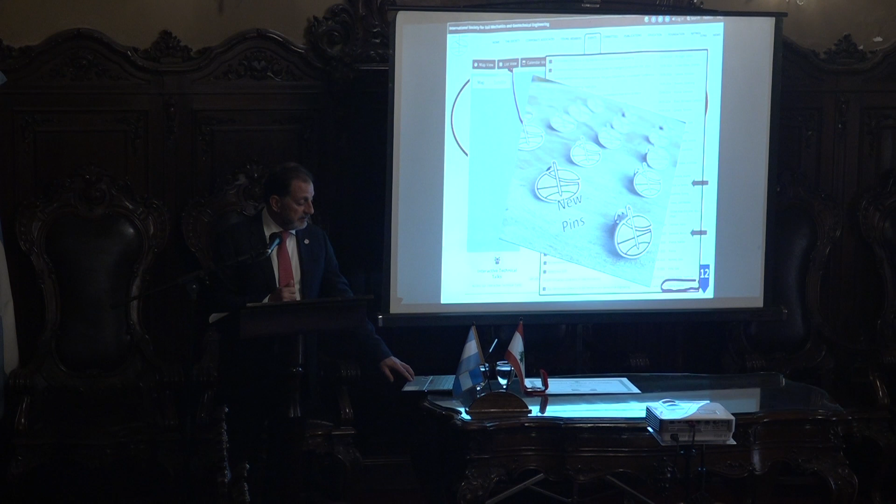And of course, we have other conferences coming up, in La Serena next week for the Pan American Conference. We have one coming in Lebanon. And you can recognize we introduced the new pins for the board. This is something you will like. I started this idea, a dream, and it became reality.

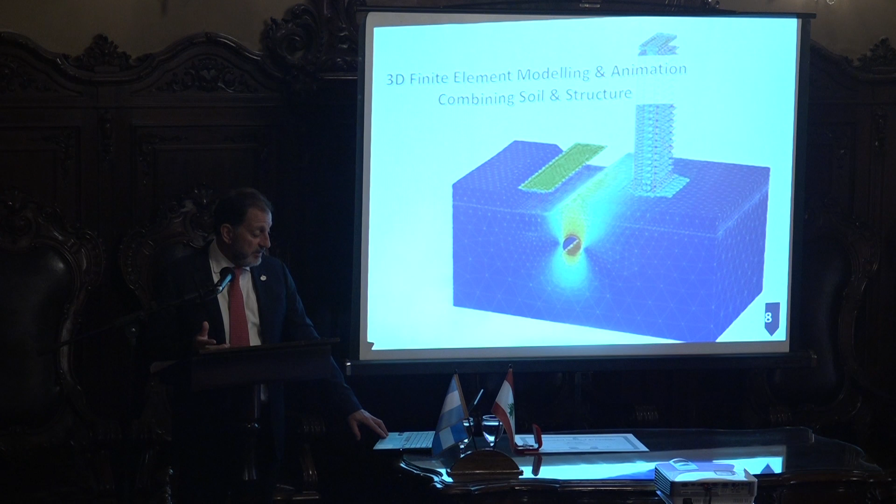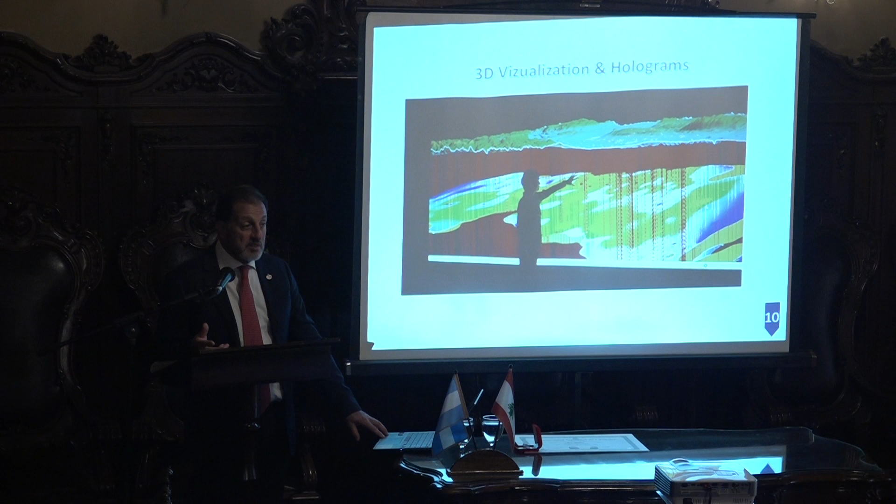So what I'm saying is always run sophisticated thinking prior to sophisticated software and analysis. Use as many methods as possible, even the latest technology like 3D modeling, AI, BIM, digital twins, 3D visualization, holograms - like geologists, they use it a lot. AI, remote sensing, drone mapping, all of this for sure. But we go back to the history, like this building, and this is what makes you feel strong.

If you see here, engineering life - what that means, I keep telling everyone - there is engineering in every move of your life. You can check the centrifugal force, you can check, let's see if it works.

This one, we need Ave Maria. No? Atmospheric pressure.

What do you think, will it work? Not all the time. If there is atmospheric pressure, the glass can be 10 meters high, right? But no, it's only a few centimeters, so it should be easy to remove your hand.

So there is engineering in every move in your life. The more you observe it, the better engineer you are. They tell us static friction is stronger than dynamic, but it's not always the case. Sometimes dynamic, applied with deformation and structural mechanics, becomes a better solution. I can stay doing magic all the time. It's not magic.

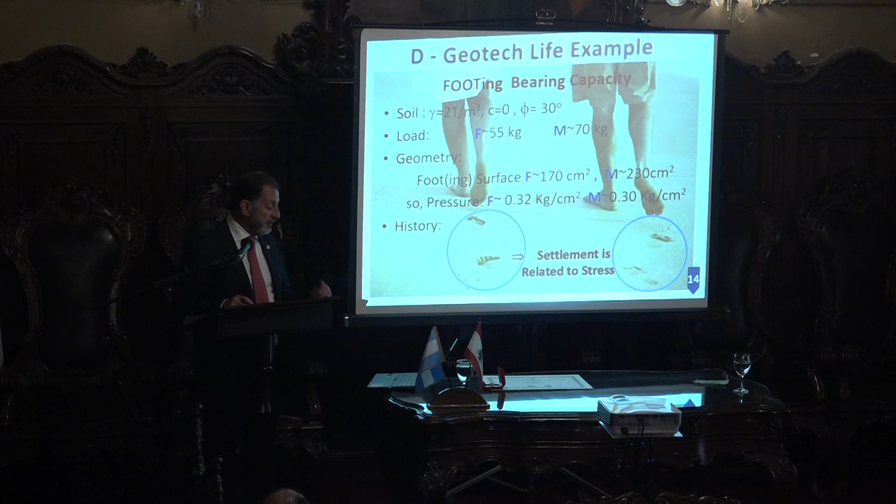Footing surface, footing. So the foot for ladies is smaller, but the pressure is almost the same. The female may have slightly higher pressure on the footing, especially with high heels. But even here, if you look at the history they leave behind them, you can detect that settlement, for example, is related to stress, not to force. And if you apply the most common equation, Terzaghi's equation for bearing capacity, you'll see the bearing capacity is 0.1 kilogram per centimeter square, but the pressure on the footing is 0.3 on the foot.

So is this failure? In theory, it is failure. Why? Because failure is defined by us, the criterion. If the criterion is I don't want to see any deformation on the sand, we fail. But if the criteria is different, practical, like geotechnical engineers, you know they sink a little bit, so what? And then it stopped. Is damage acceptable? Yes, so it's not failure. This is the difference between theory and practice.

In clay, this may not be the case. I just mentioned this for geotech. So if we keep going, now we look at more details.

The suction, if you notice, they're not walking on dry sand. They're walking on wet sand, not fully saturated sand. So if you add the suction component and play with the possibilities, you'll see that if they sink a little bit, 1 centimeter, and you have suction, they're safe because the ultimate bearing capacity is much higher than the actual pressure.

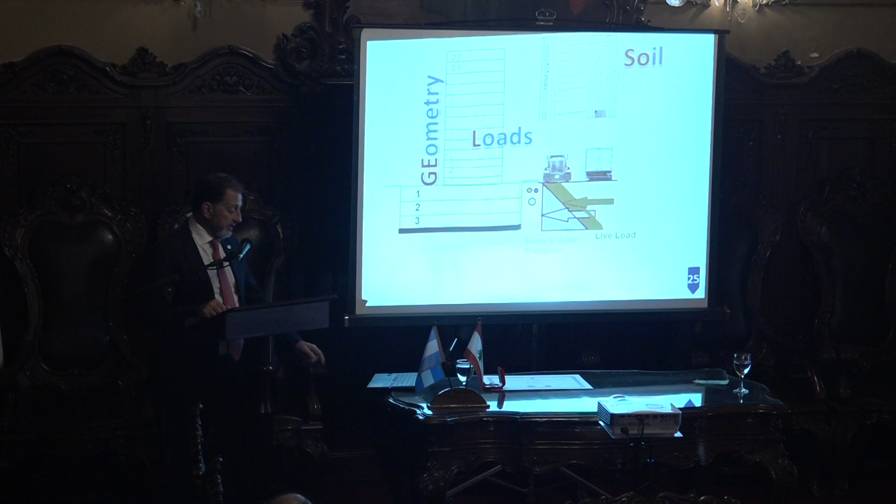Everybody was running, including myself, to see what happened. And I will go back to soil-geometry. We collected the soil data, the geometry, the loads, lateral loads, of course, where we put the anchors. But the most worrying load for me was how to detect the impact of 20 stories on the existing mat — how is it going to turn and hit me on the sides? There is nothing in the code, nothing in the book, about how to determine the force that's going to hit me laterally.

I had to crunch my brain and go back to the original Fourier series equation I showed you, and use historical data from a similar demolition in a nearby but smaller building. I had to exaggerate a little bit and go using the Fourier series from the time domain to the frequency domain. When you do that, you can detect the peak acceleration and use those peak accelerations to determine the expected pseudodynamic forces. Keep in mind those deformations — I'm going a bit faster due to lack of time.

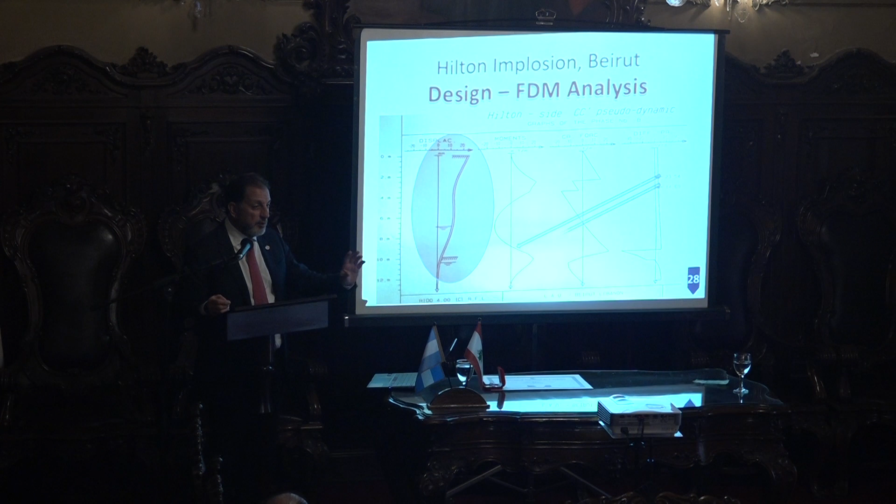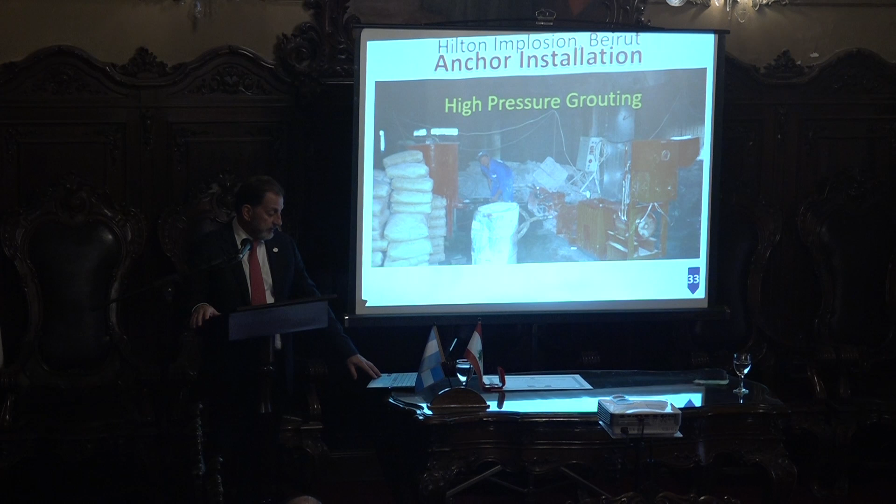This was a big question mark until they cleared everything, and I was very happy to see that all the walls were still stable, with all the ground anchors sustaining the dynamic impact force.

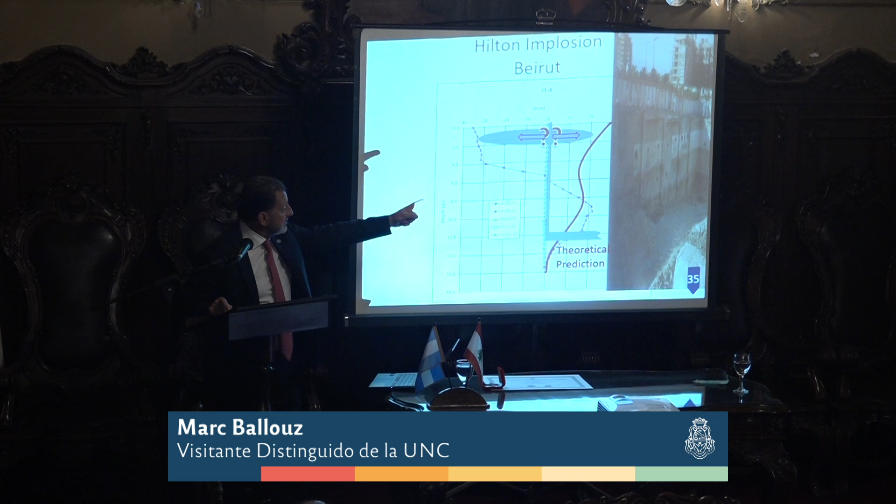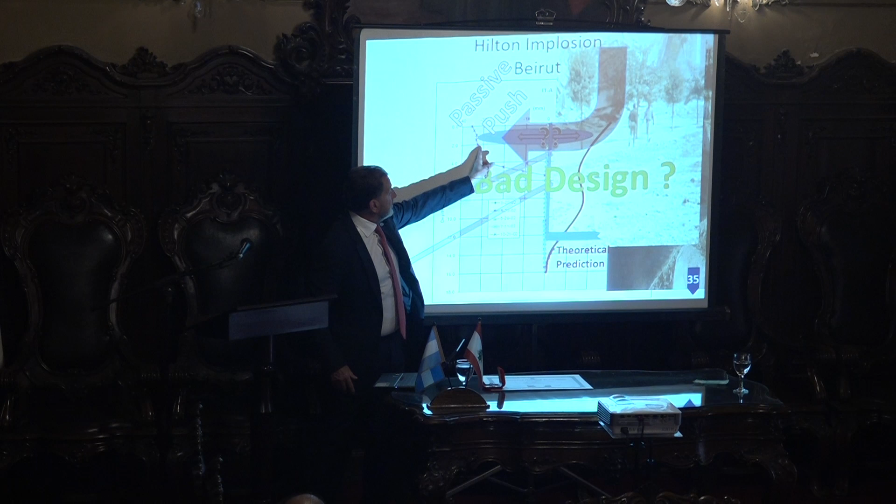Quick analysis — remember that curve? This is the theoretical curve, and this is the measured curve from the inclinometer. At the bottom they look fine, but at the end, this is where the column of the elevators, or the core, hit sideways and pushed passively, and the detection of the deformation was different from the predicted. So the question: is it a bad design? The answer is no, because you design for the worst case condition. In this case, we were lucky.

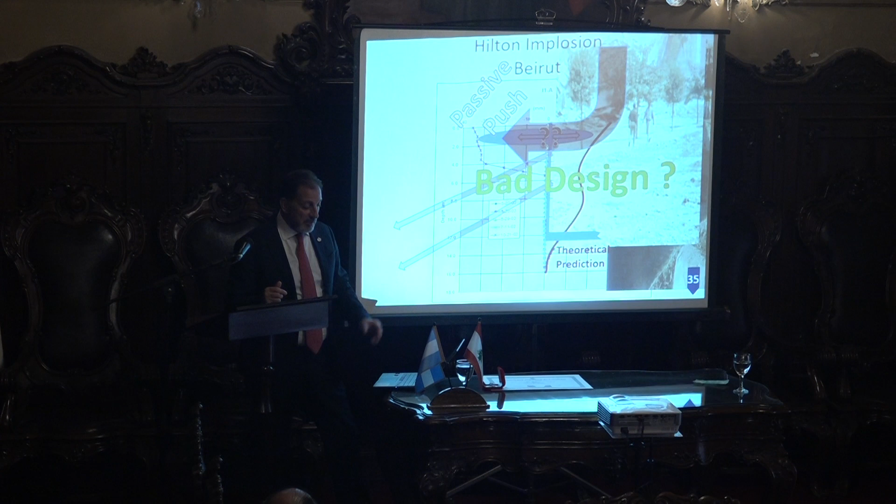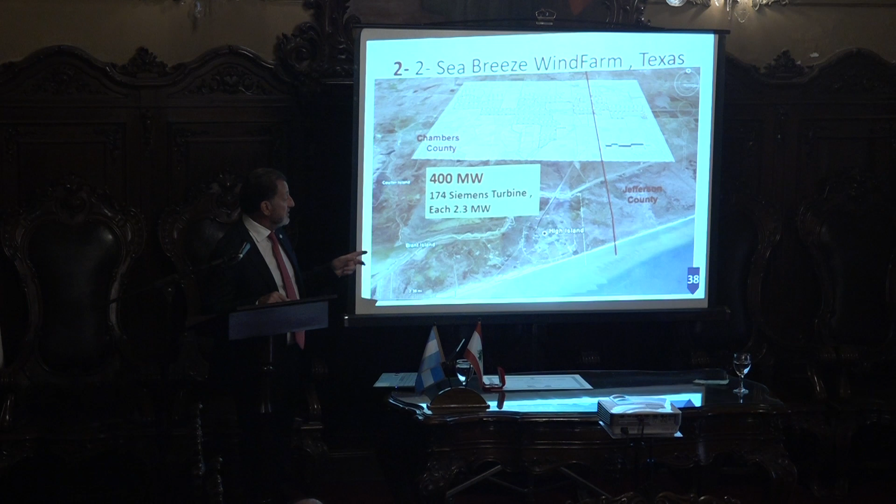Sea Breeze Wind Farm is a farm developing 400 megawatts using 174 Siemens turbines, each 2.3 megawatts. This was a while ago, but let's look at soil-geometry — I always like to go back to that. Soil data, CPT, SPT, and laboratory data; always collect the soil, the geometry, to give you an idea. This is a football field turning at 100 meters, 120 meters high. These were big turbines at the time — it was 2009, 2010.

The loads expected: each turbine was 162 tons, but dynamically it's moving at 13 tons. You expect lateral force, especially at emergency braking, developing about 1,600 ton-meters of moment. I'm sure some of you saw such numbers with wind turbine foundations. And the question was, can we do a shallow foundation? Looking at the history of the area, with all the winds and gusts and hurricanes and surge waves coming from the Gulf of Mexico, the recommendation was to use deep foundation to avoid scour and erosion.

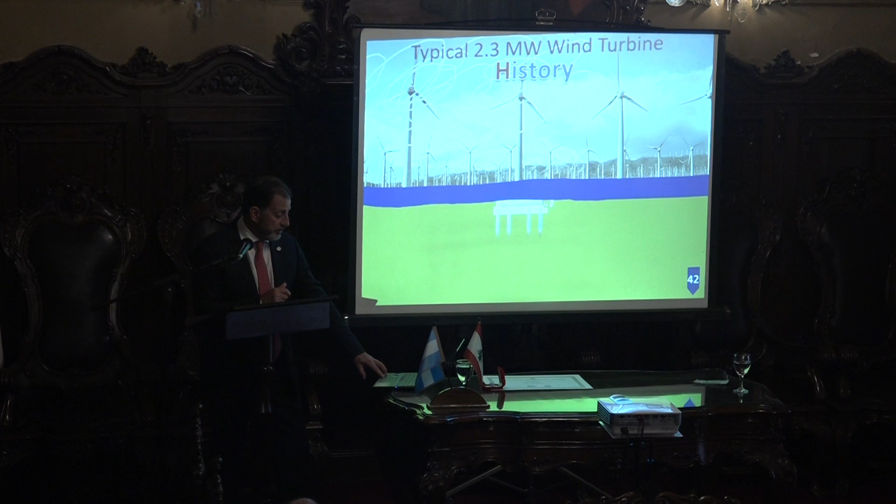Quick scenario for the case we chose, 2 lines of piles. But I'd like to mention that the only reason we allow adding lateral load to vertical load is because the vertical loads touch the lower layers of the soil. The lateral loads affect the top layers. That's why we allow adding them together. Otherwise, it's a no-no, because soil is not elastic, you know that.

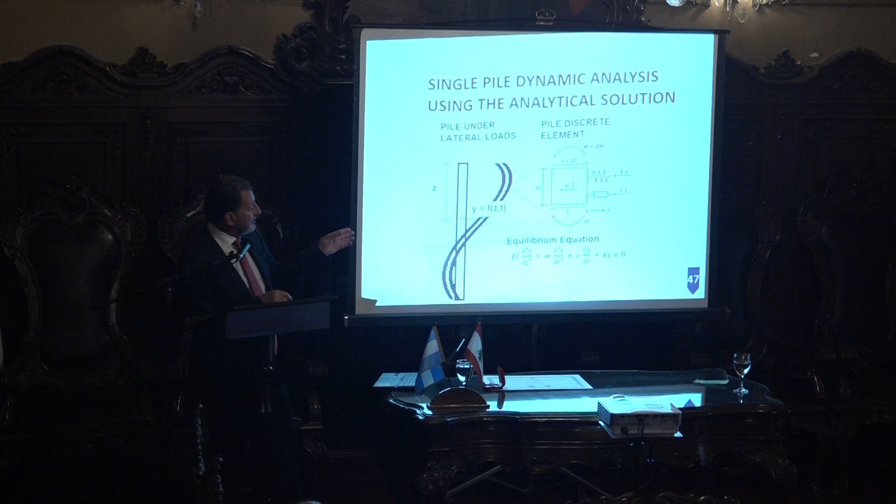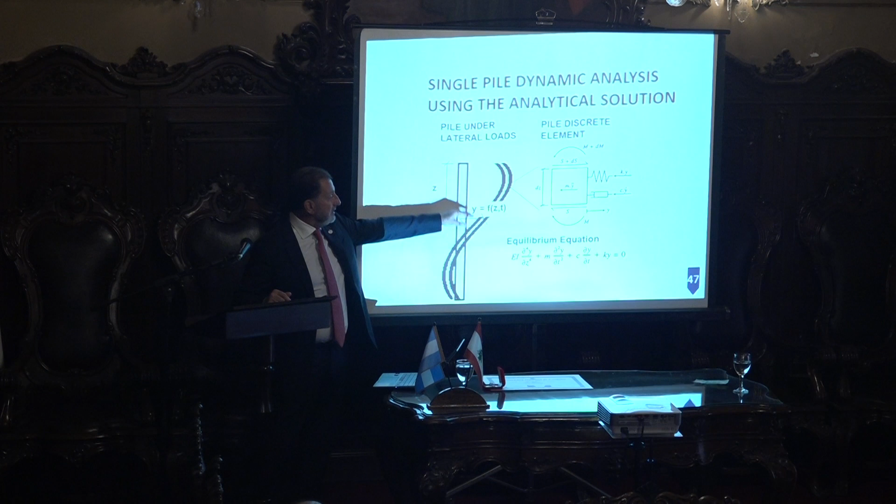At the time, we had 2 theories for lateral loads, rigid and flexible, with some criterion. So there was a missing link, which theory to use. And under dynamic loads, and this was my PhD dissertation, if you look at the equilibrium differential equation, fourth order, I had to solve this. It took me 1 year to detect the deformation of the pile laterally at any location and any time as the wind is turning. And if you type it in font 16, the solution was 33 meters long.

Roberto, you can recognize the Ferrari, yeah? Good memory. The formula, yes.

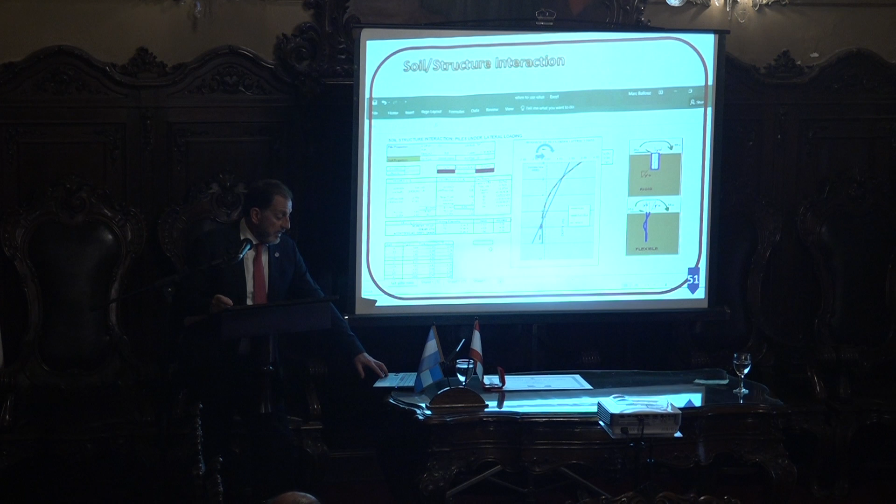So if you take a pen or a pencil and you push it against your fingers, so I'm pushing the pile, the fingers are the finite elements of the soil, and the pen is the foundation or the pile. So in soft hands of a lady, it can be rigid, and if you're strong, not like me, it will bend and become flexible. Anyways, the new theory we developed can show all these differences, and the solution between the two is not an average. I will skip that part.

These are the expected deformations of the foundation, and this is the Seabreeze wind farm.

So, quick picture from the Jeita caves to change. I will drink. So the last case, I don't know if we have time for it.

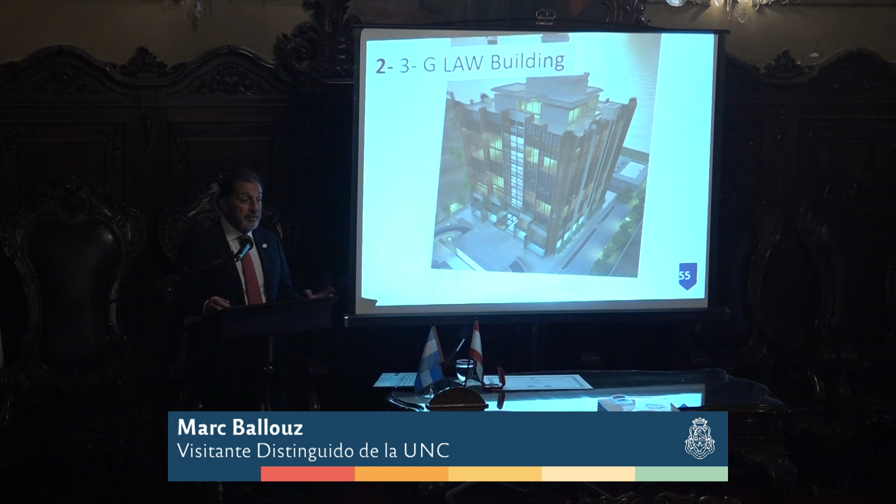The last case is a quick one. It's a G-Law building, the headquarters of a famous lawyer in Nigeria. He constructed this building, and one day I get a phone call from him saying, we have some cracks in the building, can you come visit me? So I went to visit him. He's sitting at his desk, 4th floor level, and he said, I will let the engineers tell you about it. I said, don't let them say anything.

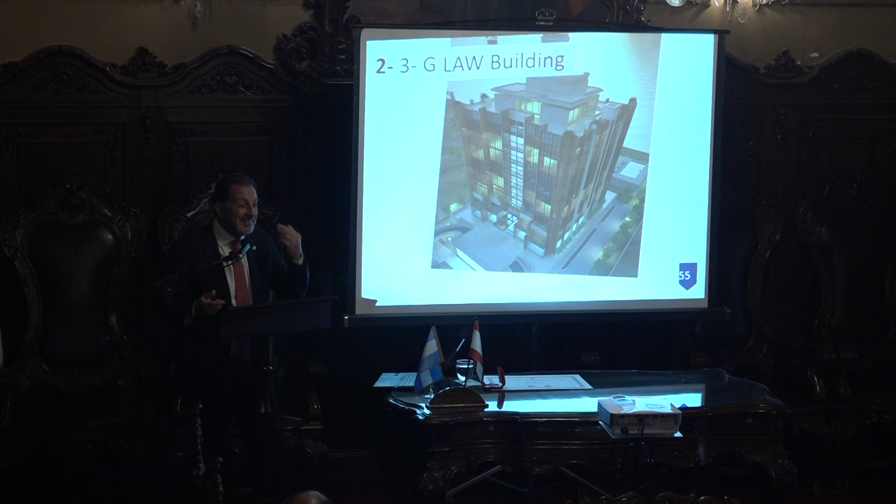He said, what? I could literally put my full hand in cracks, not in the walls, but in the columns, in the beams. I said, we have to evacuate immediately. It was the shortest business meeting in my life. I said, we'll do the meeting outside. It's crazy. He was happy with the building, but didn't know how bad it was because his engineers were scared of telling him the truth.

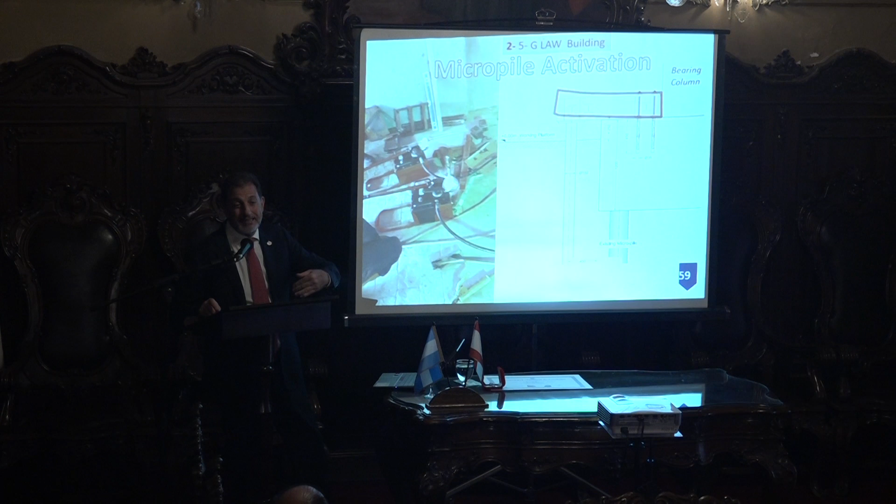I said, guys, you are doing a semi-good job, because by the time the micropile is activated, the building is sinking. What we should do instead is activate the micropile. Let the pile fail, not the building. So to gain the maximum capacity of the pile, you sink it, push it down with hydraulic jacks, and then you connect it to the structure. One micropile after the other, we were successful in saving the building.